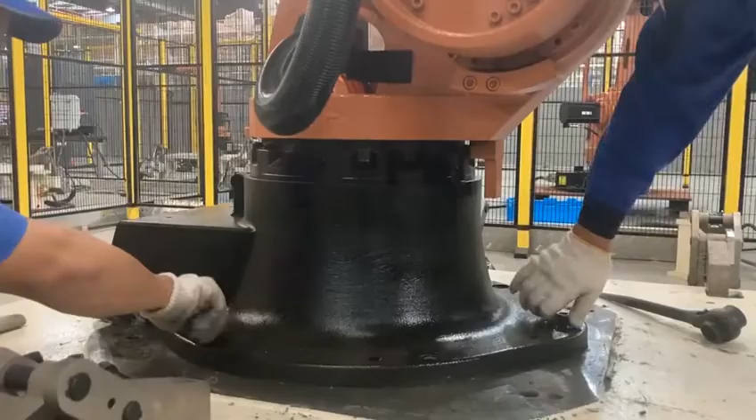The first step, tighten the body foundation on the basement. As you can see, our crew tightens the bolts and uses a ratchet wrench to fasten the 6 bolts together.

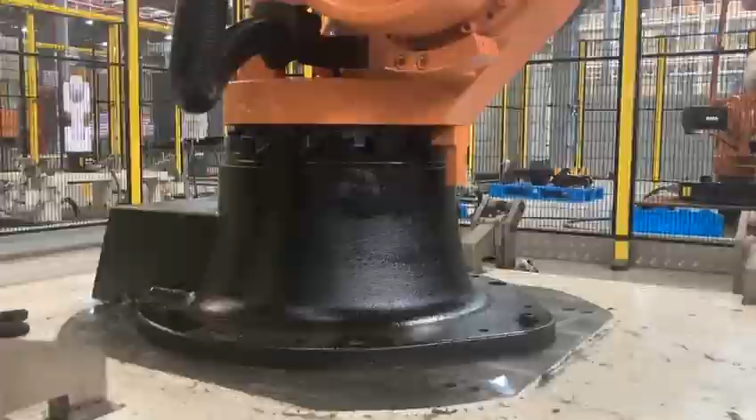Second step, install the gripper matched with the flange by 6 bolts.

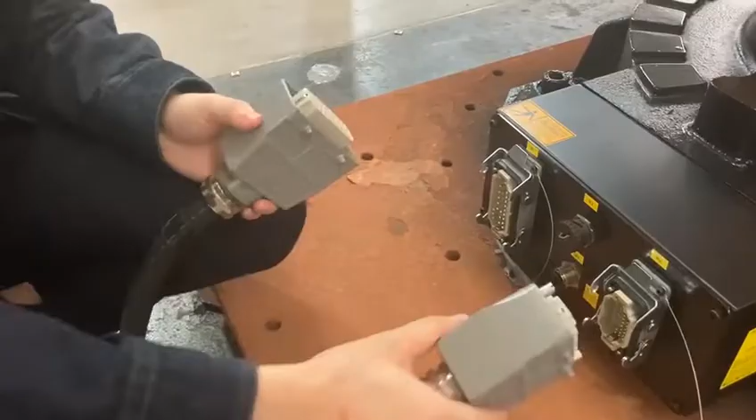Third step, connect the body with the control cabinet by cables. On the body side, the head of the cable is straight. The thicker cable is the power cable, and the engineer is holding it, then connects it to the body. On the left side there are 2 locks. The thinner cable is the encoder cable on the right side, also with 2 locks.

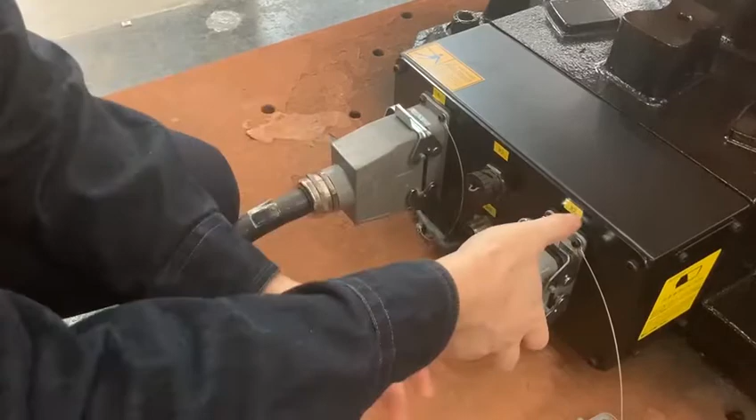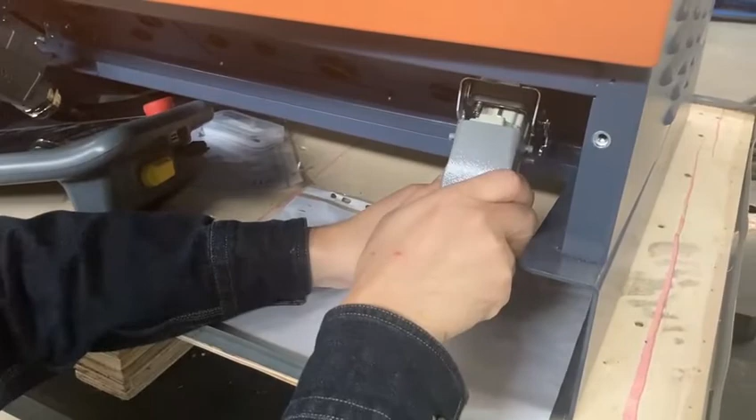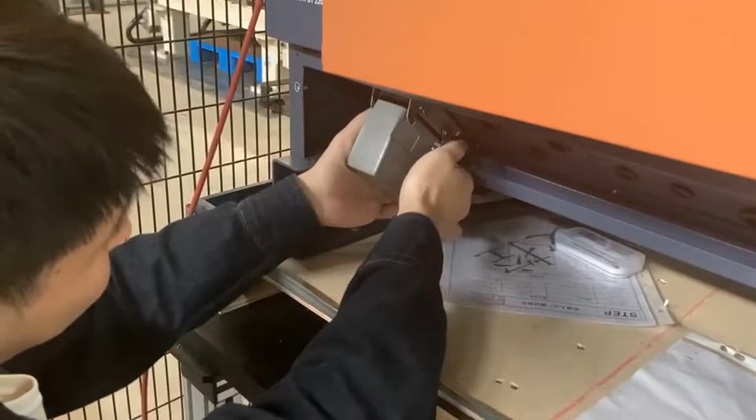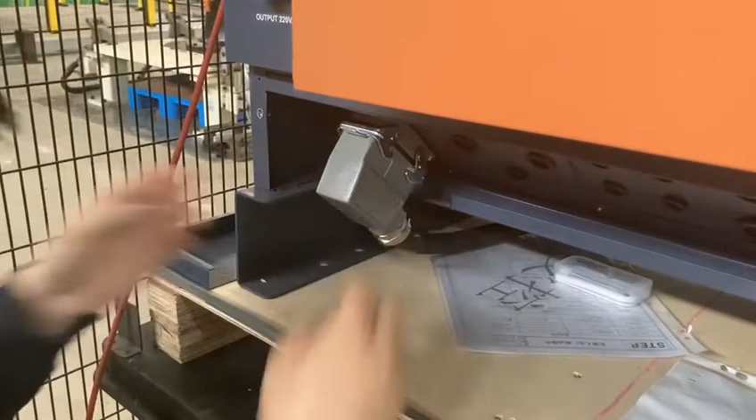Then we change to the cabinet side. The right side is the encoder cable, with 2 locks. As you can see, the head of the cable on this side, the cabinet side, is bent. The engineer is holding the power cable right now, and fastens it with 2 locks. That is the whole appearance of the control cabinet.

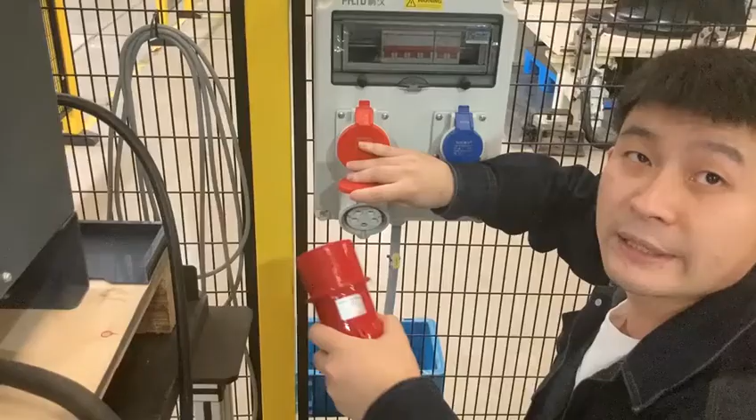The fourth step, get the robot connected to power. The power cable of the cabinet is 3-phase 5 wires. The whole set of the robot is in our testing zone, so it is a station.

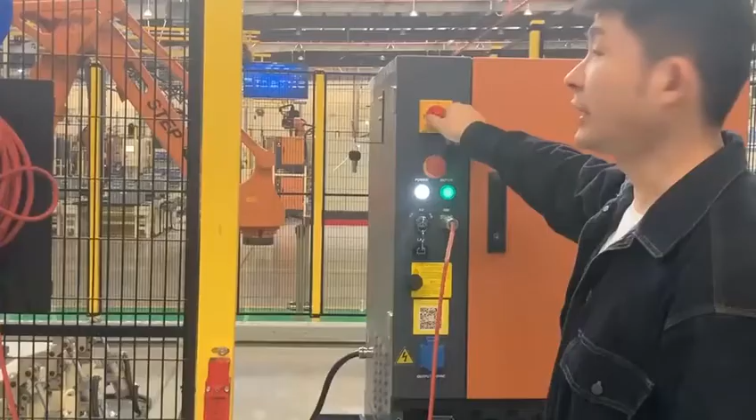This part is a brief introduction of the cabinet. After power on, please turn on the first red button, and the control box will start to work. The white button will turn on. The stop button is for emergency.

When the key is on the middle automatic mode, press the green light and the robot will work automatically. The net interface is for connecting with a computer. The red wire is for the teach pendant.

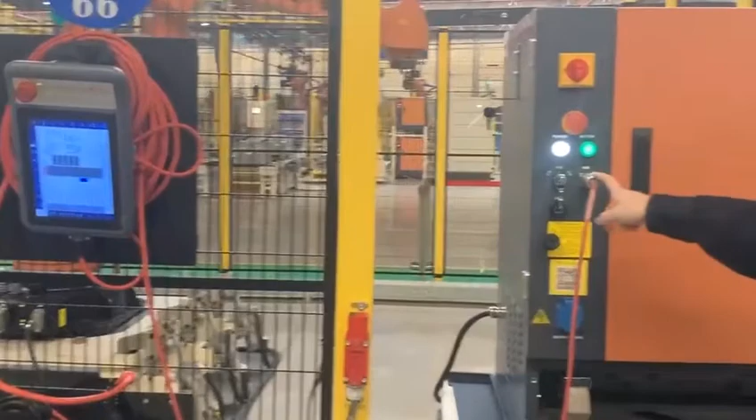I will give you a brief introduction of user programming. First, please click Help, then export the activation info to the engineer, and he will give you a license. You will get it and activate the software.

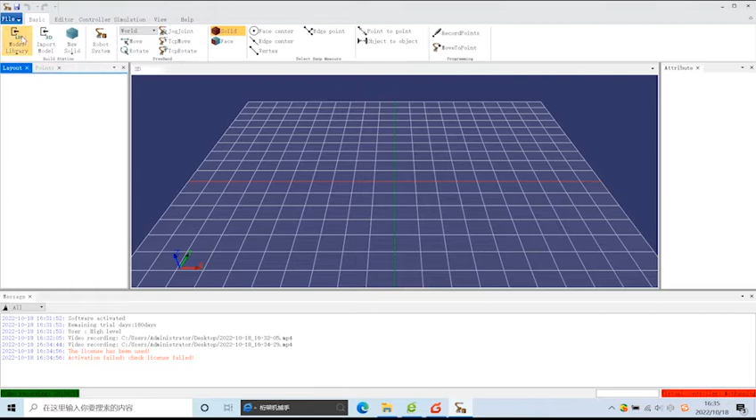Then please click Basic, then find the model library. Choose the robot type you need and set up the robot system, then change or fix the position and name.

You can make your own rules. Then find the controller, please. Open the HMI. It is the same as the teach pendant.

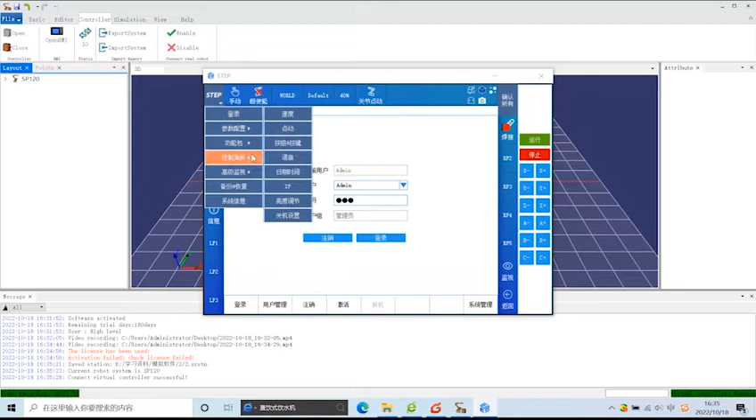Then on the third line, we will put in the password 123 and click the red button. It is login. Then on the fourth line, choose the first one, English, so we totally change the language.

Then find the step again: Feature Pack, Palette New. This is the senior pack, senior palletizing. Then you could put the product dimension, pallet, or station dimension into it. Then create the basic palletizing recipe, a senior palletizing recipe, and create a project you need.

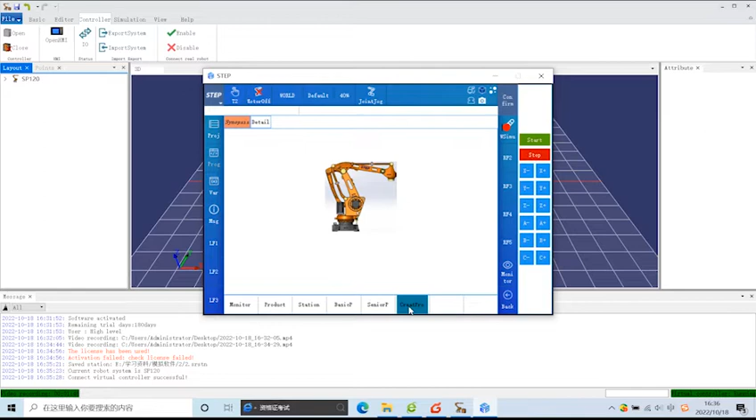So let's check how to do it. Build up a name of the product, make your own rules. The first one, I choose the base typical carton size, 400, 250, and

180 millimeter carton. Then the last 2 data points mean the distance between the cartons on the X and Y axis. Then carton second, third, all the types and sizes, all the carton size or bag size you need.

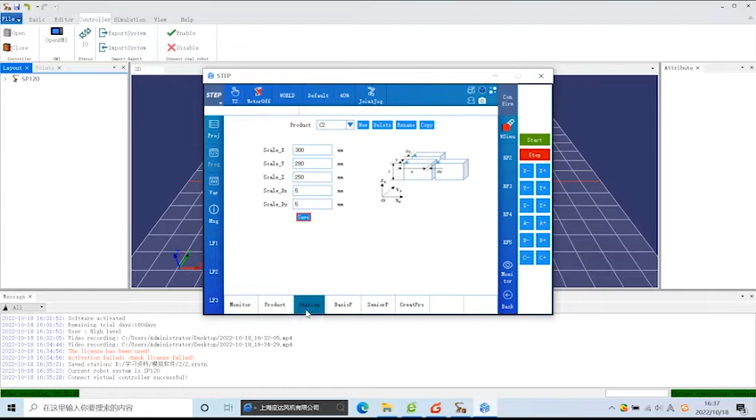Then we go to the station pallet size. I just name it T1, T2. The first one I choose the typical one, 1200 and 1000, 1000 millimeter, and save it. Yes, T2.

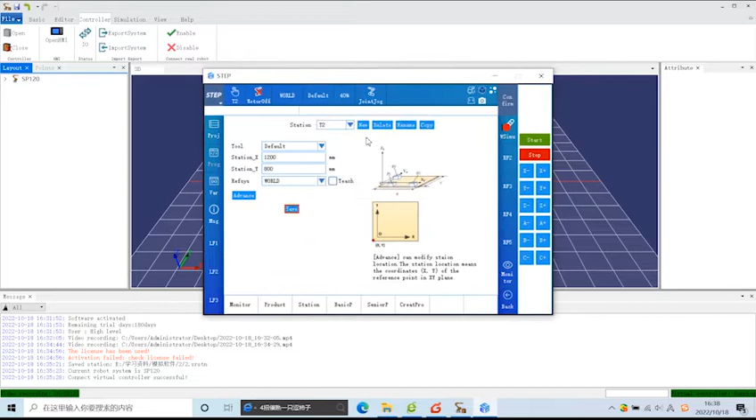The basic palletizing and senior palletizing: the only difference is basic palletizing only has one palletizing recipe, but senior palletizing you could choose different recipes in one pallet. Oh, and this is a wrong example, I got the wrong name, but you could use your own rules too.

The most important thing is finding the first position, locating the first position, and helping the robot's 6-axis ABC XYZ locate the first position. Everything will start from it. Then the pallet, the product, how to put the first one, and how many layers, how many cartons on different axes - this is very important.

For example, this one, I choose 6 layers on one pallet. The total height is over 1 meter. It will be packed up well.

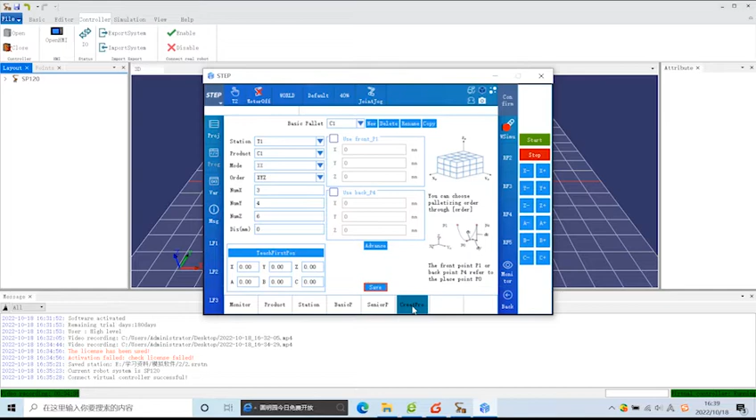Then we could try to test the project. Give a name to this project and save it, test it - because we don't have the real robot connected, so it won't succeed.

So let's go to senior palletizing. There are basic, custom, and senior - 3 types. Basic layer has a fixed recipe, but customize, you could make it yourself. So I choose E1. And for basic, you could go to the T1 station, C1 product.

The first product will start from the first position, the starting point. It will show by the data 2. So what we are editing is data 1, the pallet recipe. The 405 millimeter means the total length of the carton and 5 millimeter distance between 2 cartons.

Then we first palletize according to the x-axis. The software can only help make the recipe, but I did not adjust the starting point - you could check it on data 2.

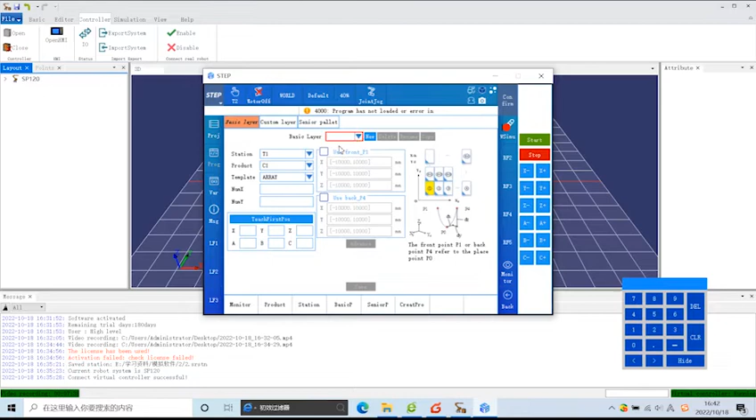Saved successfully. You will check it. They have fixed patterns in basic layer.

You could customize second E2, E3, choose different stations, different products, and make different recipes.

This recipe still goes from the x-axis first, but if you want to go by the y-axis first, it is okay, I think. Just please pay attention to the limit length.

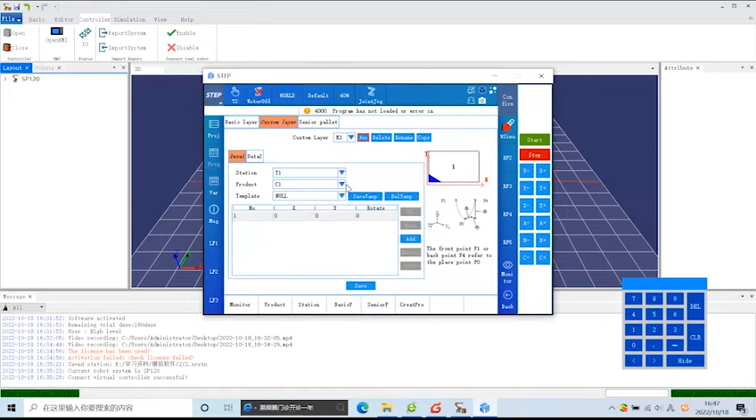Sometimes we will have the case where one gripper will take 2 cartons or 2 bags at once. So product C1, C2 or C3, whatever you name it, one product seriously contains 2 real bags. So product 1 should be the 2 cartons or 2 bags size. Then you could create E3 now. If you find out you miss or lose product data, you could go back to create it again.

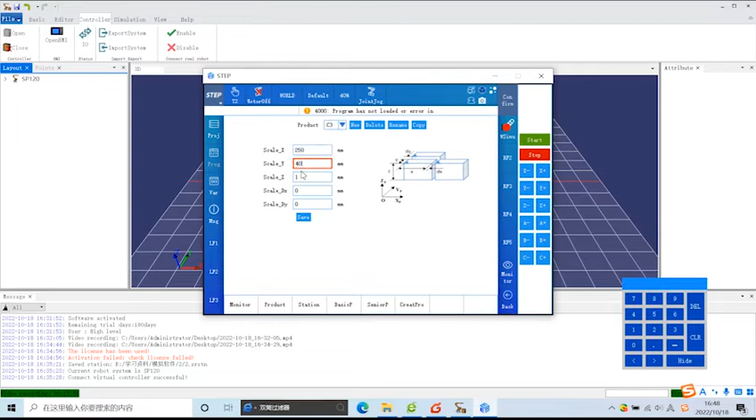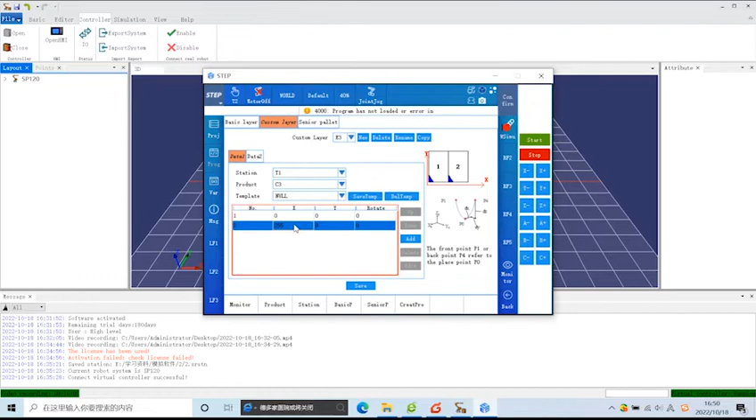This time, I change the product direction. E3 recipe still goes to T1 station, but I choose the C3 product. C3 is same as C1 in dimension, but the direction is different. So if E1 is first layer and E3 is second layer, E1 first layer, E3 second layer, then we gradually have one pallet with 2 kinds of recipes, one by one. That is the senior palletizing function, different from basic palletizing. But please pay attention to the length limit.

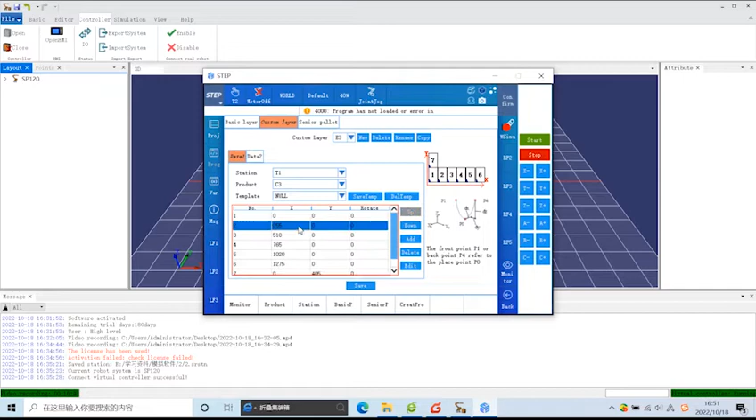It's simple, very easy. I just want to get clear, get easy for this first teaching, a brief introduction. If you need detailed help, please contact anyone from STEP, and we could have an engineer help you.

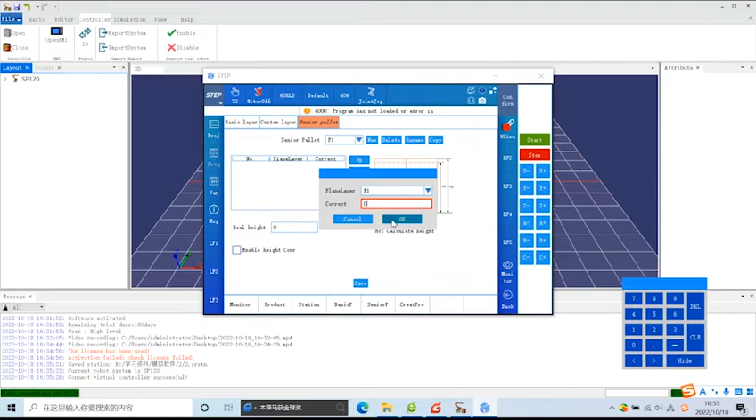Now we could go to the senior palletizing. I choose the P1 name, and now you could add different layer recipes into this: E1, E3, E1, E3. Then the pallet is 6 layers. Total height is over 1 meter about.

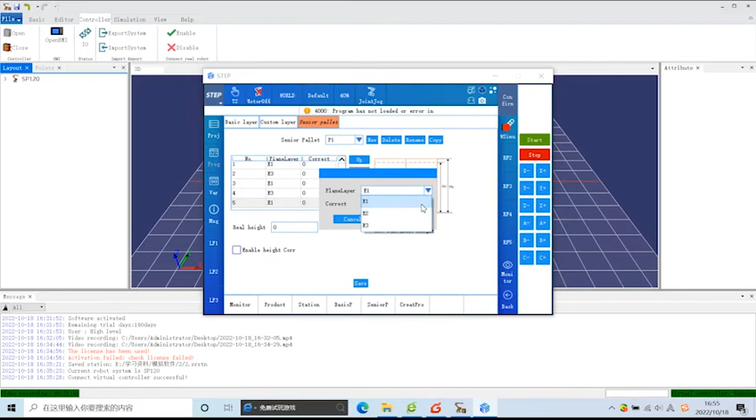Then you will find there is a real height setting down below there. This data is fit for, for example, a little bit flexible package, like a bag, not a carton. Carton is fixed package, but a bag is a little bit flexible in real conditions. So the real height needs to be adjusted for real conditions. Then we save it right now.

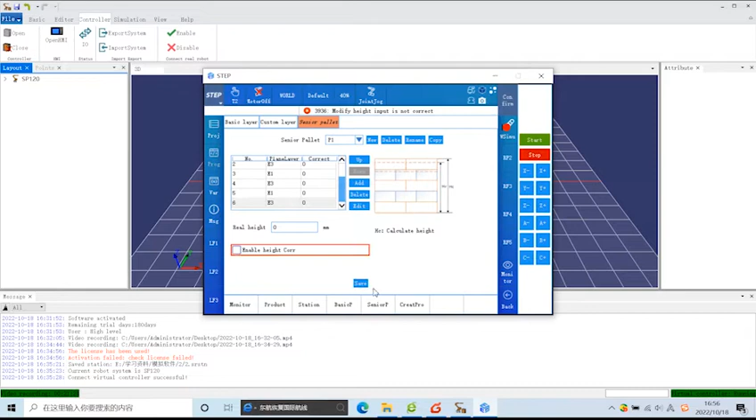Try to create a project and give it its own name. Now we have a brief introduction of the hotkeys: LF1, LF2, RF1, RF2. Then you could have it for a specific function, a specific sentence. Then save it. When you need to use it, you could directly recall it.

Now we go to the project. Please click new, and you will find this sentence. It will help you create a project: pallet entry point, update palletizing, set palletizing.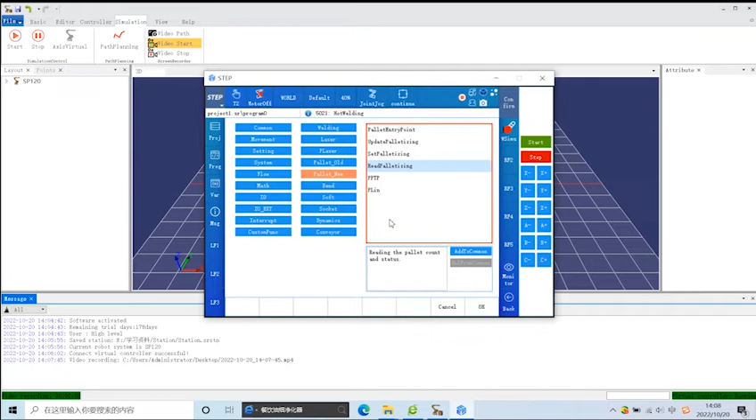Read palletizing, you could check the status. All this will help you create a project. The Flow ProgCall will help you call the senior palletizing and basic palletizing in the whole project. So let's cancel and go back to the project.

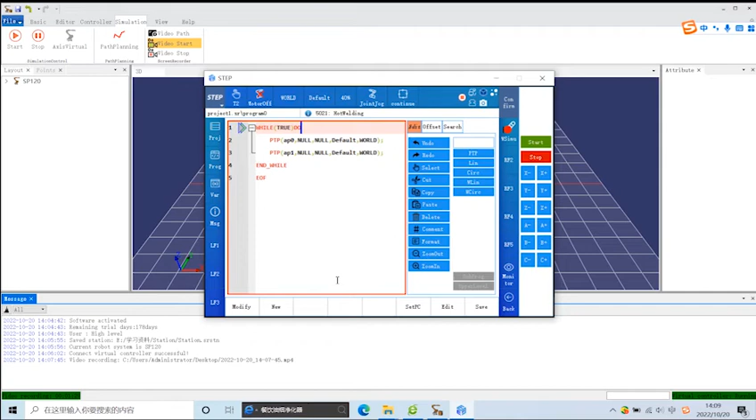Last part, I'm gonna give you a programming example. Till now, we already made the product palletizing information in the system and did the basic palletizing and senior palletizing. Finally, we got the palletizing program. Until now, you could see the first one as the main program, and the last layer 1 to layer 3 output are sub-programs. We could, according to this sub-program and the instructions in the system, make our palletizing project.

So next step, we're gonna start or file a new project, name it main project. And you could, according to the real working condition, write the details of the project. So please load the project first.

All the instructions in the new project. So pallet new, choose set palletizing, put the variable main program into it. Then after set palletizing, the next step is read palletizing.

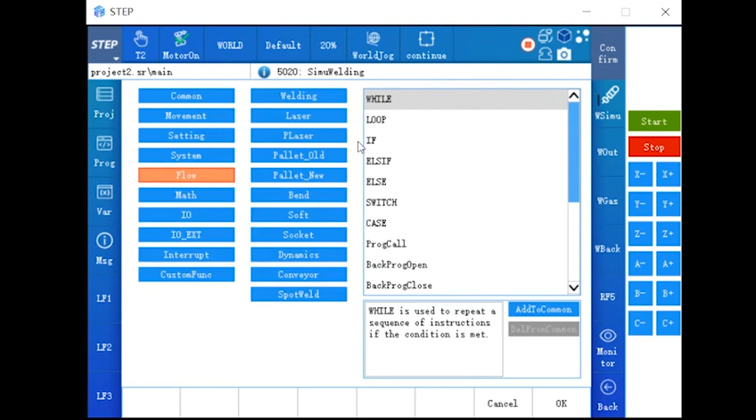Then the next step is we should go through the program. We already have called it, yes, put the variable into it. Then the next step is to update the pallet condition of quantity and layer condition. The second step is read pallet, confirm the quantity and the details.

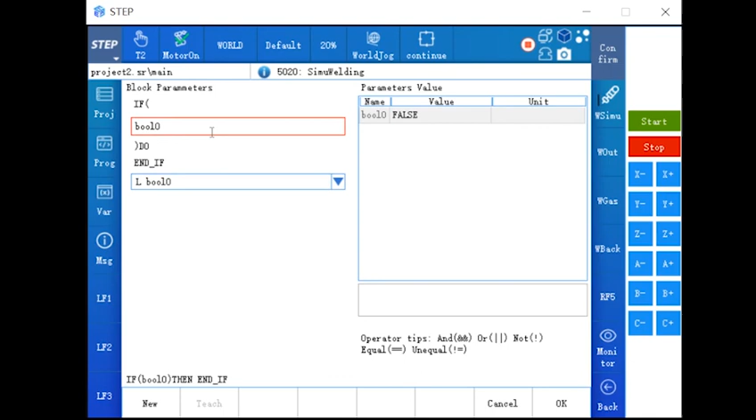Then have a basic judgment to check if the pallet is full. bool0, bool0. And if bool0 is false, or if it is true, then we should give a signal to people. Then they will take over the full pallet, put on an empty pallet, or give a pause signal.

Then the next step is to put on the new pallet, and everything will go again. So that's all, this is the basic frame of a palletizing project. You go according to making your own project based on the real condition. If you need help, please feel free to contact us. Thank you.